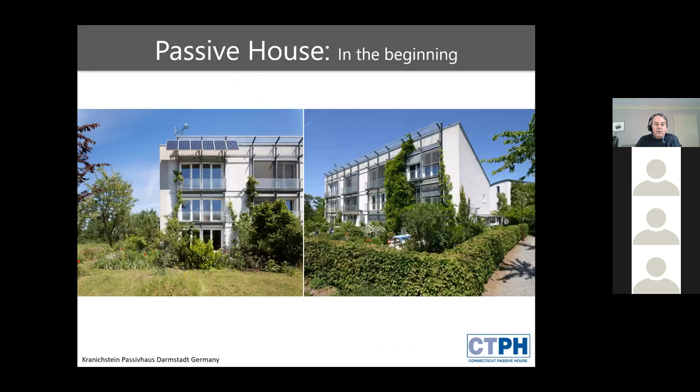In 1991, a physicist, Dr. Wolfgang Feist, expanding on work that had been going on in Canada in the 70s and 80s on super insulated houses, set out to design a house without heat, a pretty radical concept. The result was this 4-unit townhouse, of which he occupied the end unit, and he fitted it out with data acquisition systems to test his objectives and theories about how this could be accomplished. From this experience, he developed the Passive House methodology, a proven, measurable, science-based system to drastically cut energy consumption. In the 30 years since, thousands of passive house structures have been built all over the world.

Dr. Feist is a brilliant physicist, but not a great branding professional. The chosen name has caused some confusion and perhaps hindered its growth and adoption, and hopefully we can clarify any of those misconceptions in the next hour. As the following slides will show, Passive House principles can be incorporated in multiple building types and styles across the architectural spectrum. It obviously relates to single family houses and can be a very contemporary design, such as this one in Washington State, or more traditionally designed single family houses, such as one right here in Connecticut.

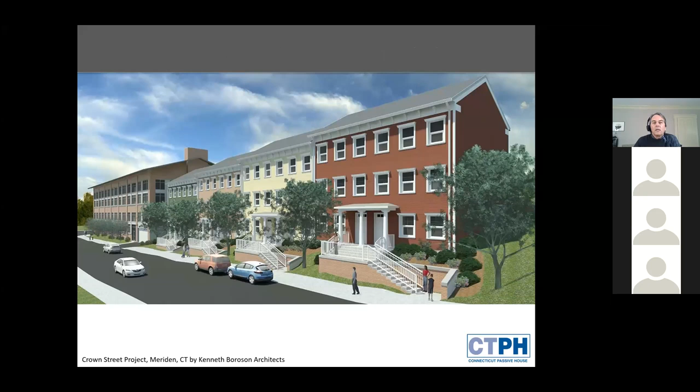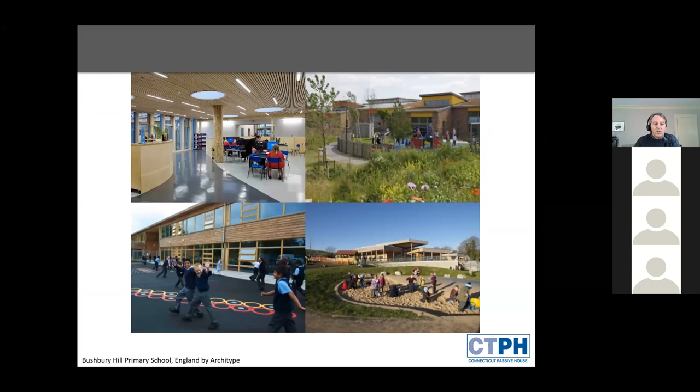Passive House is being used more and more for affordable housing, multifamily housing in Connecticut, like this project, and throughout New England and the country. Passive House works for office buildings. This is the headquarters of the Rocky Mountain Institute in Colorado. All over Europe and increasingly in the States and in New England and in Maine especially, Passive House buildings are being constructed as schools with obvious benefits for the inhabitants and for the long-term benefit of the communities in which they belong. And institutions of higher education, colleges and universities who build for the long term are increasingly building their new projects to the Passive House building standards. This is a dormitory at Williams College.

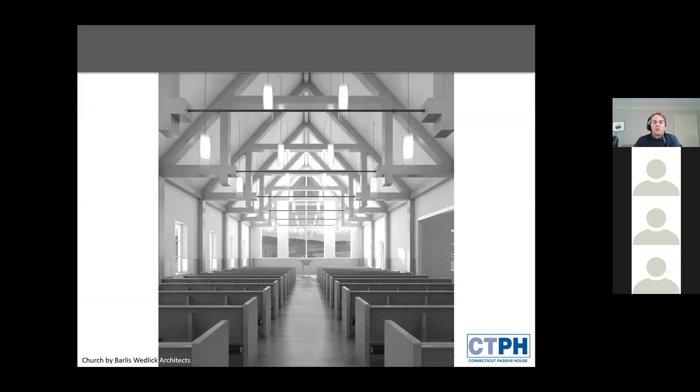But Passive House can also be used for churches. It can be used for infill urban housing, such as this project where an old brownstone was renovated in Brooklyn to Passive House standards. And it doesn't have to be low rise. More and more high rise office buildings and apartment buildings are being built to Passive House standards. This is the residential tower at the Cornell Tech campus on Roosevelt Island in Manhattan, 26 stories, 352 apartments, all built as a Passive House structure.

And finally, on the books now, and I think close to starting construction, if not started already, the Sendero Verde project in East Harlem, which is a mixed-use affordable housing complex, which could become the largest Passive House project in the world at 709 units, a school, a community service space, public gardens, and retail. So we come up against a lot of myths and misconceptions about Passive House out in the world and even among the profession, among architects and builders and engineers, such as that it's only houses, which the previous slides have dismissed. People assume that it's highly insulated and airtight, it must be stuffy and you can't open the windows. All of these things are untrue.

Expensive? No. Upfront expense, but quickly made up by reduced mechanical costs and savings over the life of the building and utility costs. People assume that a building that has reduced the energy consumption down to near nothing must be too complicated, and a very smart house full of sophisticated wiring and sensors and things. That's not true at all. A smart house type thermostat in a passive house will just die of boredom because all it does is monitor a stable temperature with very minimal variation. And finally, that it's only suitable for temperate climates. Passive houses are being built in the far reaches of Canada, in our country, Minnesota, Maine, cold climates, as well as in Australia and the southwest of the States.

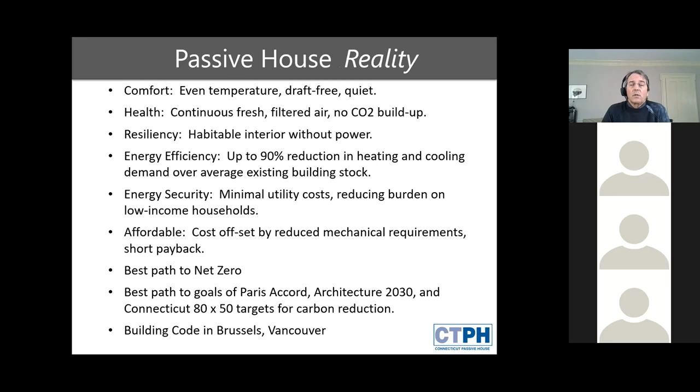As I mentioned, the cost upfront for a more robust building envelope is quickly offset by reduced mechanical requirements and a short payback. And it is the best path to get to the goals that we're trying to achieve in the next few years, the Paris Accord, Architecture 2030, and within our own state, the Connecticut 80 by 50 targets.

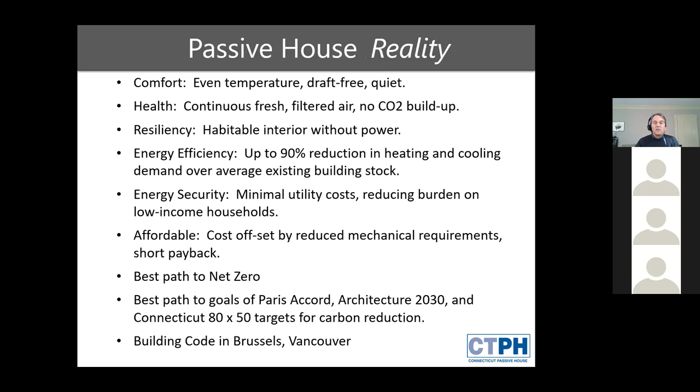In some cities, passive house is now the building code: in Brussels, Belgium, in Vancouver, in Canada. This is the way you have to build. They're taking the long view. So what does define a passive house? There's a short little video here that tries to answer that question in 90 seconds.

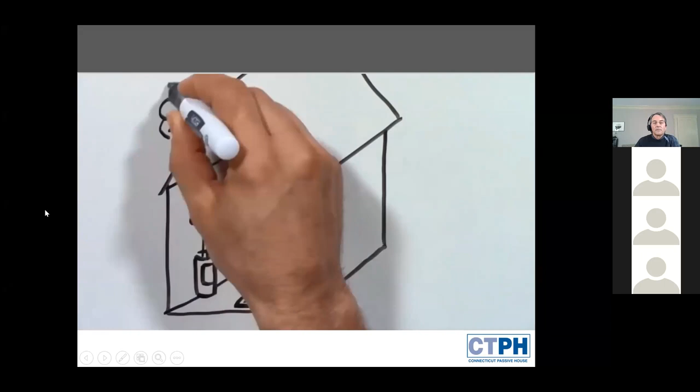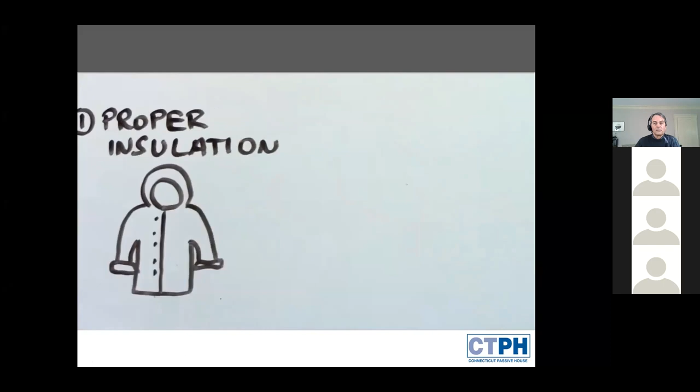Passive house explained in 90 seconds. Does your house have a heater in the basement or maybe a fireplace? Probably also a central air conditioner or maybe a window unit. Did you ever wonder if it was necessary? In 1991, a physicist in Germany, Dr. Feist, built the first passive house. Here's what he did. 1. Proper insulation. It's just like wearing the right winter jacket, it also doesn't need a heater. 2. No air leakages. There should be no holes, small or large, to let hot air out of the house.

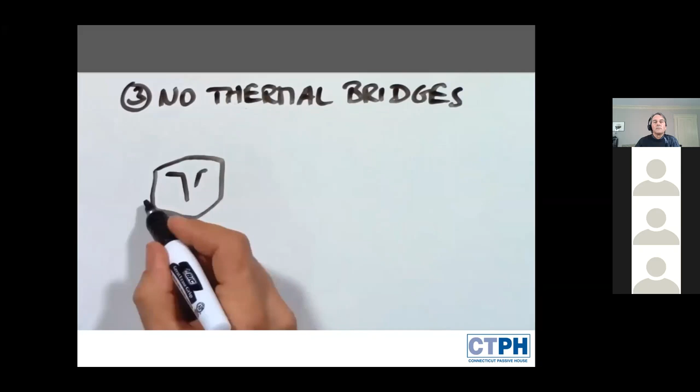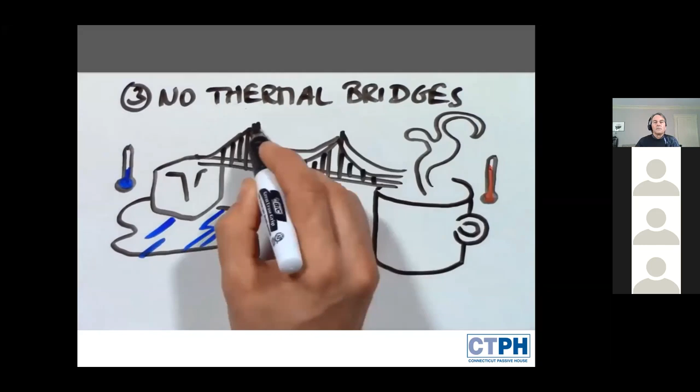3. No thermal bridges. A thermal bridge is like a road for heating energy in which warmth can travel right through your walls. As a matter of fact, most of our houses have thermal highways in our walls where heat can easily travel to the outside. Plus, the house needs proper windows, most of the time with triple pane glass. It needs to be oriented properly so the sun can heat it in the winter and shade is provided in the summer. And it uses an HRV, a device that provides the inside with fresh air without letting the heat out. Add all these things up, and it turns out your house doesn't need a heater or air conditioner.

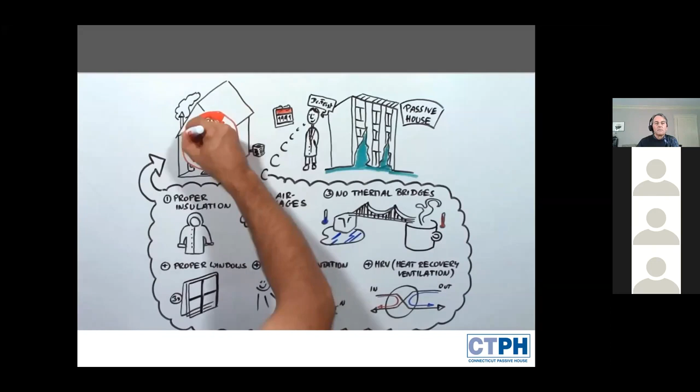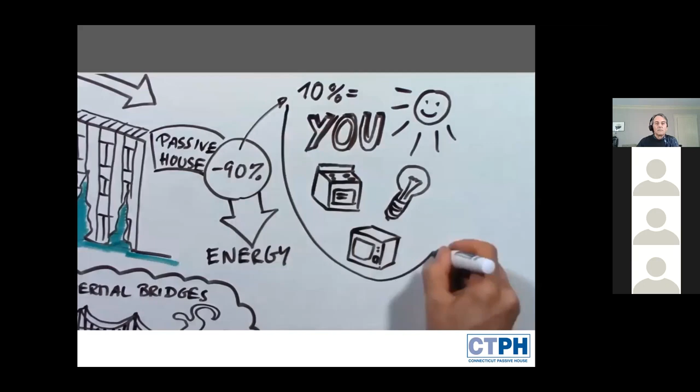So where does the heat come from? A passive house needs 90% less energy, and that can easily be supplied by your body heat, the sun, your appliances, light bulbs, and even your TV. This saves you a lot of money on your heating bill and helps preserve the environment. Did we make it in 90?

Well, you don't need to see that twice. Passive house.

It's important to understand that passive house is a performance-based standard. It's not prescriptive. It doesn't tell you exactly how to achieve these goals. It is performance-based, and it's validated through energy modeling, a few different software packages that can be used. It's validated through the strict standards and protocols that are applied to certain elements to get a passive house certification, such as windows and ventilation and mechanical equipment.

Construction details are verified, tested, time tested, and vetted by Passive House Institute. And finally, on site, you're validating your own performance through blower door testing and ventilation system commissioning and sign off.

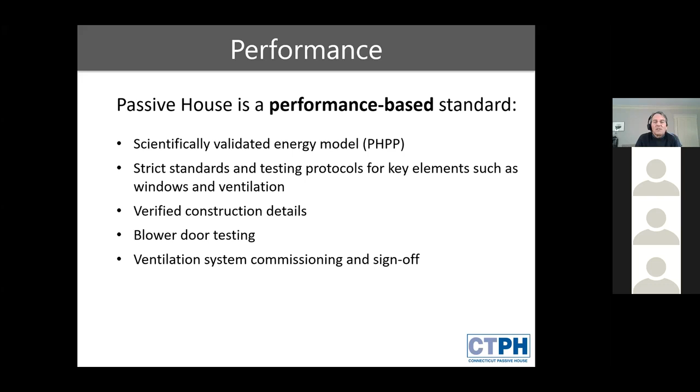So we get to the 5 principles which were alluded to in the little video. The 5 basic principles of passive house construction include thermal insulation around the whole building envelope, thermal bridge reduced design, passive house windows and doors, airtightness, and finally an adequate ventilation strategy. We're going to touch on each one of these 5 principles very superficially over the next few minutes. The first being insulation.

So why do we care about heating in buildings? That's kind of a silly question. Obviously, we want to stay warm when it's cold out, but we should understand that space heating accounts for a huge majority of the energy consumption. This is just an example of what it means in New York State, space heating as a percentage of total energy consumption.

In the US, across our whole country, buildings consume 48% of US energy and contribute 45% of US greenhouse gas emissions. According to the Sierra Club, in New York City, buildings are responsible for 67% of the emissions. And that makes real estate the city's most polluting industry, ironically.

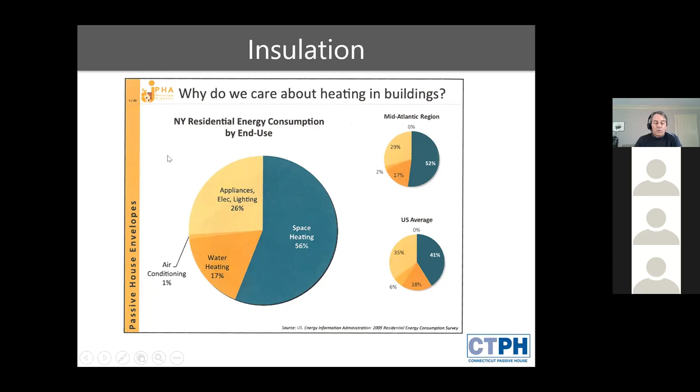So we need to try and reduce all of these things. And in a passive house building, we do it through obvious ways. We increase the R value and the robustness of the building insulation system. There are dozens of ways to do this, varying materials with different degrees of effectiveness and R value per inch, which comes along with different degrees of environmental consequences. Again, passive house doesn't tell you what you have to use or even how much. You just have to use enough to get to the standards to certify your building at the end of the process.

Typically, though, a single family home in our zone for passive house might have an R60 roof, R40 in the walls, and R30 in the floors or under slab, with the obvious benefits of reduced heat loss in winter, reduced heat gain in summer, and often overlooked but very important for humans' comfort are the interior surface temperatures. If we provide a thick enough envelope, these interior surface temperatures are not much different from the temperature inside the center of the building. So you're not aware of changes in temperature and drafts and increased discomfort.

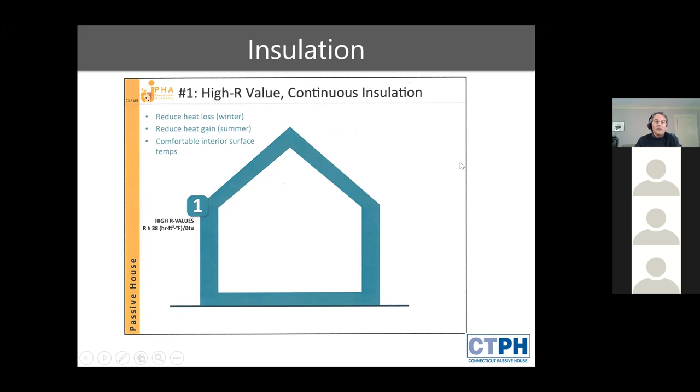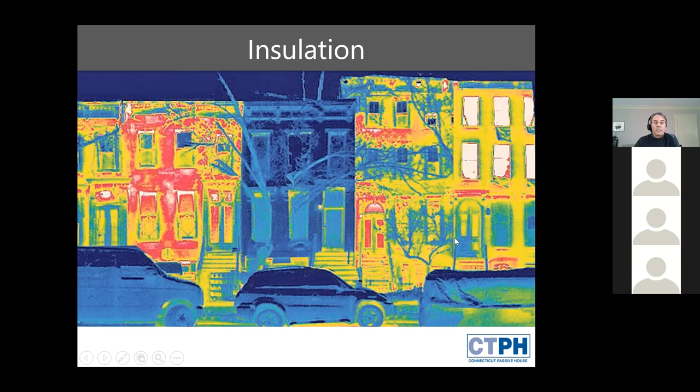When we think about how we're insulating these buildings, we need to think about the wall cavity, and the key word there is cavity. A lot of contemporary framing and engineering for buildings requires more and more wood studs, and this is an example of a kind of a wall that makes a passive house adherent start to break out in a sweat. It's just a highway for thermal bridging and all heat to be drained out to the exterior. Plus, it doesn't allow any space for insulation within that wall cavity.

So there's a few different options that we could pursue. Just one of many strategies is a double stud wall, a simple framed wall with conventional framing on the outside for added insulation, or a structural framed wall on the inside with a truss joist set up to have the added depth that allows for the continuous insulation blanket. All of these methods are standard framing, just not something that a framer does every day, but certainly not that much to ask to get the benefits.

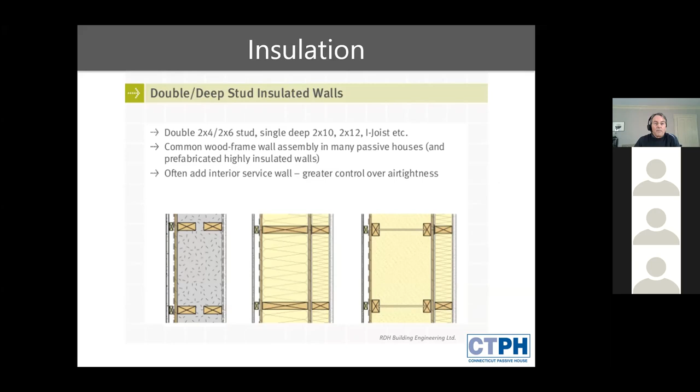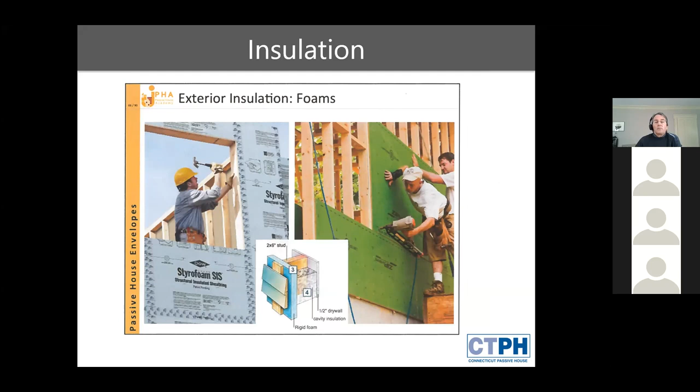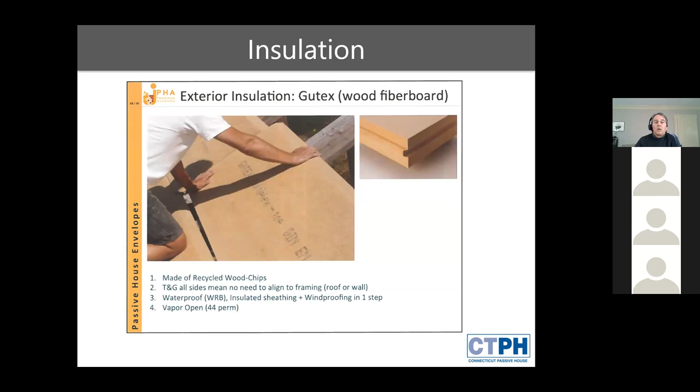We have to be considering the exterior insulation so that we get that continuous wrap of insulation around the perimeter of a building and minimize any opportunities for thermal bridging. That can be accomplished with exterior foams or some more environmentally benign materials such as a wood fiberboard product. This one is imported from Germany, but there's now an old paper mill in Maine being converted to produce this in the States. So hopefully we'll be seeing a lot more of that readily available on the market.

And in masonry construction, obviously masonry is a terribly conductive material, poor insulator. So we have to keep that exterior wrapped with a continuous insulation of an exterior insulated finish system or some kind of insulating blocks, which then can be stuccoed or cladded over in some form.

You have to think about the roof and how you're going to get added insulation in your roof. And one strategy in wood frame construction is with a raised heel truss, where your truss is designed so that you get that continuous 16, 18, 24, however many inches of insulation your project requires, that can run continuously over the top plate of the wall, guaranteeing that there's insulation blanket wrapping your building.

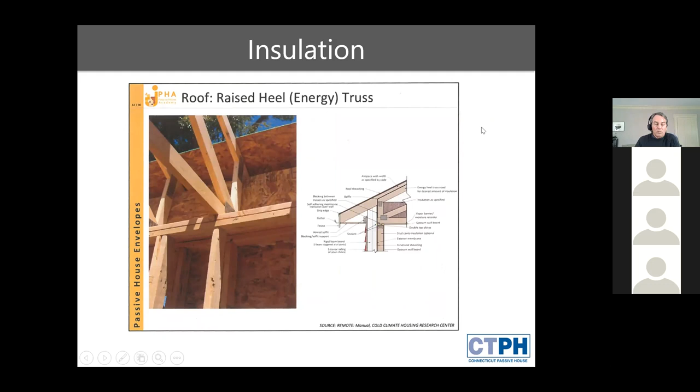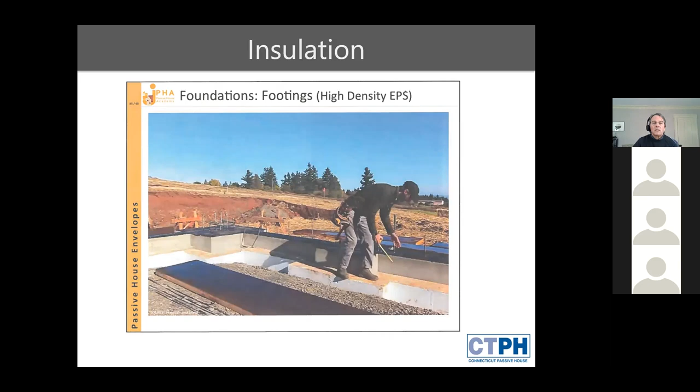And we have to think about foundations and footings. Obviously below grade, we're using a lot of foam to do that. There are other products coming online that are available, such as a Roxul product that can work under a slab, a product made of spun recycled glass material, which works as an insulator as well as a sub-base for your concrete slab. So there are many materials and strategies. Again, it's not prescriptive, it's all performance-based. And that segues us into the second principle, which Trip will describe for us, thermal bridge-free construction.

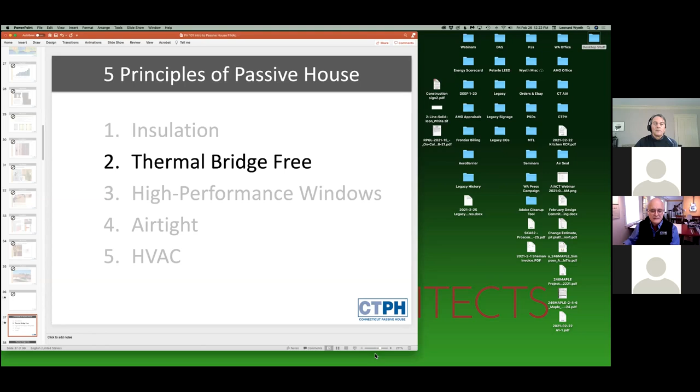I assume that's out there. Does that appear right on the screen? Yep, looks great.

Thermal bridge free. Let's face it, some materials conduct heat a lot better than others. Obviously, steel is a lot better conductor than fiberglass insulation. However, wood, for example, is also a pretty substantial thermal bridge. The notion is very simple. The more thermal bridging there is, the more heat loss there is in the envelope.

So you can imagine that all thermal bridges, by whatever material, affect the amount of energy required for heating and cooling. It's a condensation and moisture related issue, and there's thermal discomfort. Basically, thermal bridges are bad.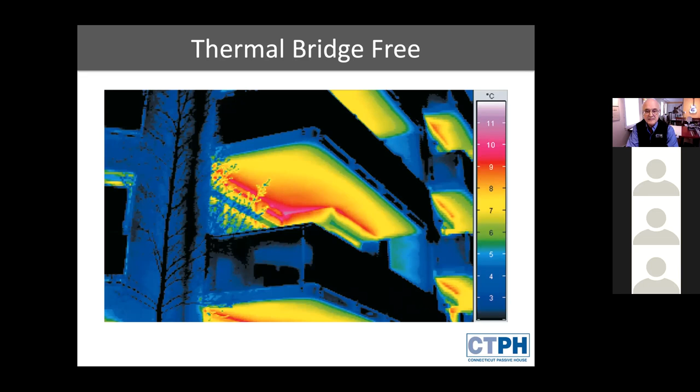I'll take an extreme example. I really, really like this building, the Aqua Tower in Chicago. But notice the architectural expression of these balcony-like structures that extend out past the thermal envelope; notice that they get denser towards the top. Chicago is known as the Windy City, and there's more wind up there than there is at the street level. So what does this look like from a thermal camera's viewpoint? Looks like a really effective heat radiator.

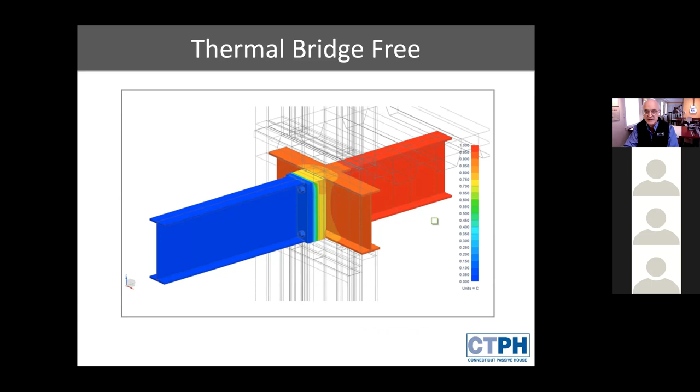It's also not necessary. Available now are structural foam blocks of such high compressive strength that they're very good insulators, not just thermal breaks, but very good insulators between exterior steel and interior steel. And this is equally true for columns. Their compressive strength is more than adequate to handle that.

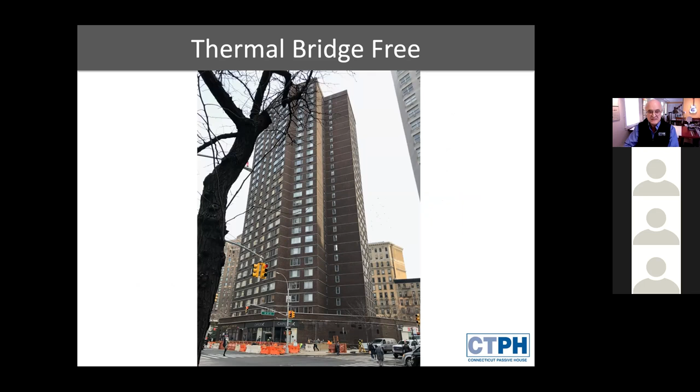I just wanted to throw this example out because we've all seen buildings like this. It's a developer housing project of structural slab, where the slab is extended out to the face of the building and expressed. And it's done that way for purely economic reasons. It gives a platform on each floor to build up the CMU, some XPS foam insulation, and then some brick, with metal studs and sheetrock on the inside.

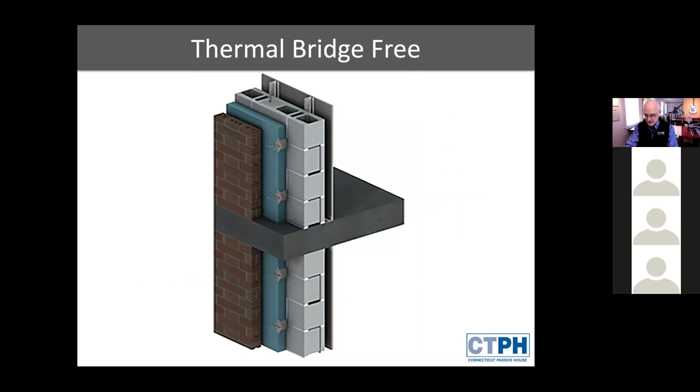But look at the thermal bridge of that slab extending out there. No matter how you cut this, that slab is going to be cold on the interior, cold enough, in fact, for condensation, even frost and ice to build up on really cold winter days inside the building. Another example of the floors really being effective radiators out to the outdoors.

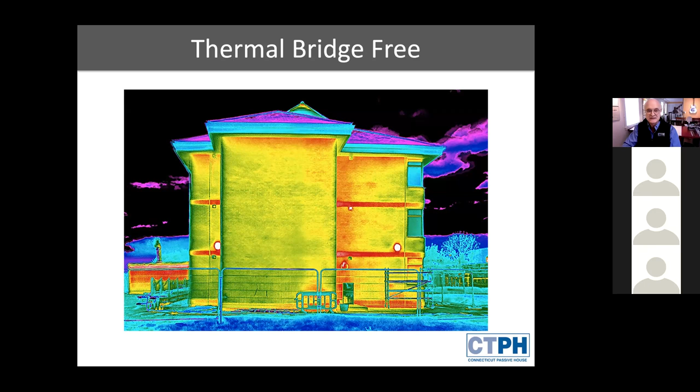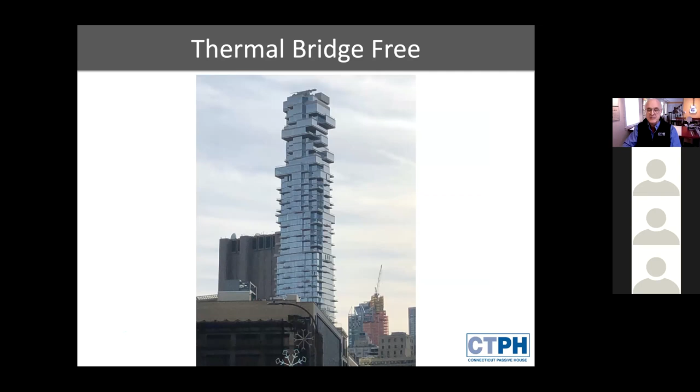And you can probably imagine, when I snapped this photo driving out of New York, I'm not sure who did the building, but the amount of energy that's escaping through a structure like that.

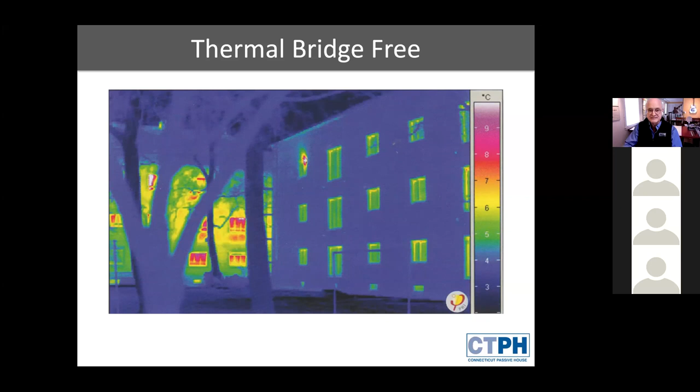So what about the windows? We've been taught from the start that windows are compromised. I mean, think of it as an ideal. If you had an enclosure that had no windows or doors, it was just a beautifully insulated box, you'd have a heat loss ideal. 68 degrees inside, 0 outside, no leaks, no drafts, no problem.

Well, almost no problem. If you're claustrophobic, there might be a big problem, but you might find it dark and depressing. You might have a perception of no fresh air at all. But by golly, it's a good thermal envelope, and it'd be easy and cheap to heat and cool.

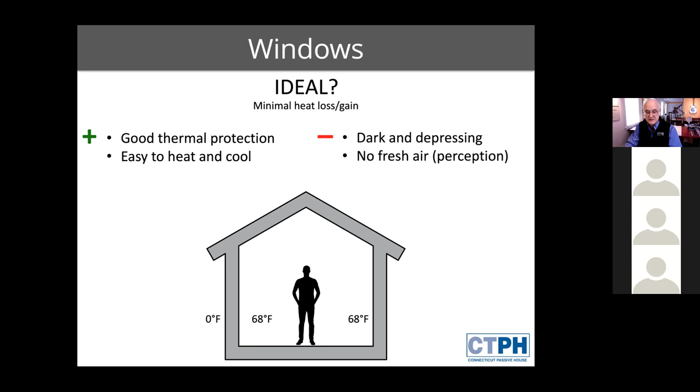But if we have to have windows, okay, let's just throw in a single glazed window to make a point. 0 degrees outside, single glazing, even if it's fixed, you're probably going to have surface temperatures below 40 degrees, so the air temperature on just the inside layer of the glass is going to be barely above the 30s.

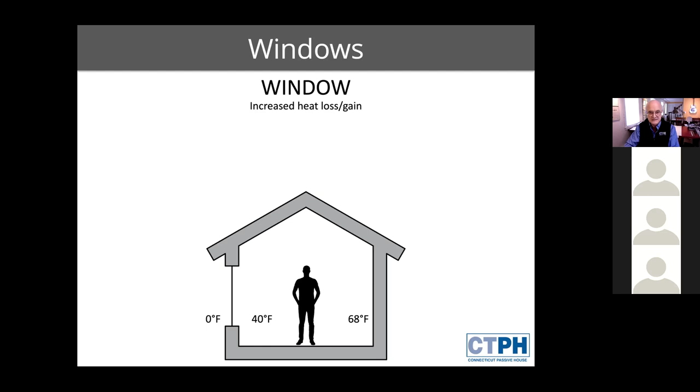So the consequence, of course, is you've gained natural light and views. You've got fresh air now, assuming that it operates. You can use it as an extra escape, that's good, or throw a chair through it if you have to. But you're going to pay more for heating and cooling, and you're going to have condensation and frost on a window like that.

The additional problems include convection, a cycle where the 68-degree air gets close to that cool surface of the glass, it cools rapidly, falls, and creates a good sized draft on the bottom, displaces the lighter, warmer air and creates a cycle. In other words, a constant draft along the lower level. Not only that, of course,

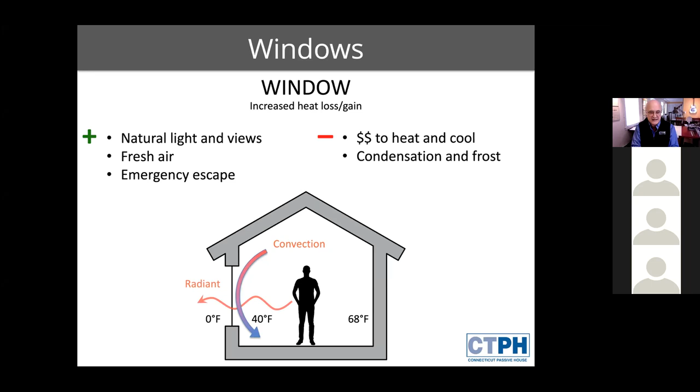but as we all know, there are two types of heat. There's convective and radiant. Radiant is only line of sight, and it's directly from a warmer surface to a cooler surface. So if you have a bare arm, for example, in a situation like this, even in the center of the room, you feel goosebumps on the exposed arm because the heat is leaving the body so quickly.

So in this situation, you have limited choices. You can kind of put a scarf on the guy, better boots, and suck it up, or deal with some mechanical solutions. But let me address the condensation for a second. Here's a double glazed insulated window in a northern climate.

It's clearly cold outside. It's had multiple hits of cold, if you will. The outside is a sheet of ice along the lower portion, and the inside is a sheet of ice along the lower portion. A couple of things to note. Note that in the middle of the glass, there is not a condensation problem. And remember that all of the American manufacturers will give you an R value of their windows in the center of the glass. This is a great example of the center of the glass is usually not the problem.

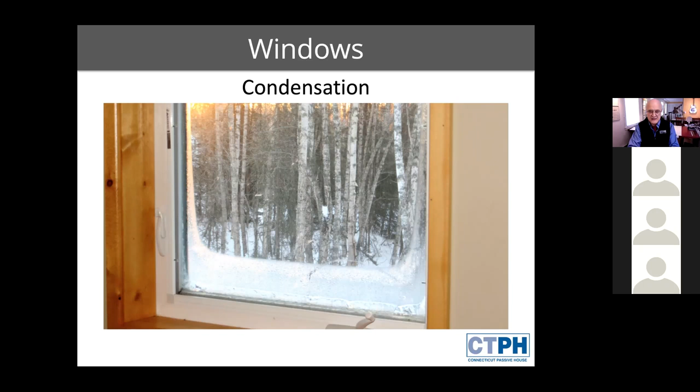The problem has to do with the thermal bridge around that perimeter. That's an aluminum spacer and in this case, a PVC frame. It conducts heat so effectively that you end up with situations like this. Now, don't get upset. I know you haven't looked at a psychrometric chart since high school or college, but this is just to make a point.

It's looking at 68 degrees inside and 20 degrees outside at 30% relative humidity. The dew point's at 35 degrees Fahrenheit. At 50% relative humidity, it's at 49 degrees Fahrenheit, and at 60% relative humidity, it's 54 degrees Fahrenheit. So rule of thumb, if you want a window that will, in our heating zone, not suffer any condensation, it has to perform effectively enough so none of the interior surfaces, either on the glass or the frame, fall below approximately 60 degrees. Obviously, higher is better.

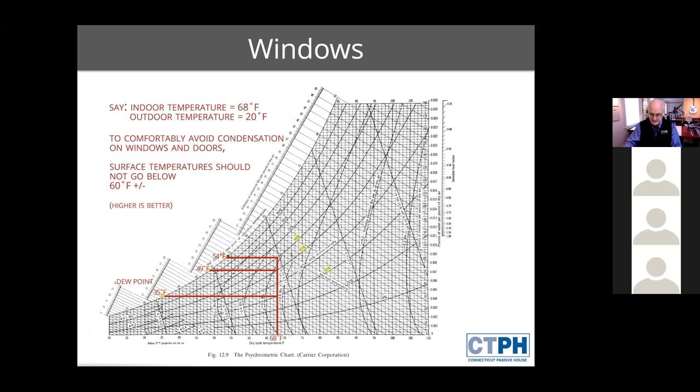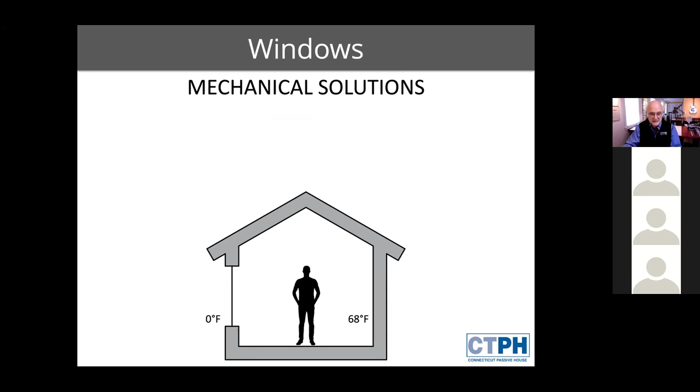So we'll circle back to that. Let's go look at the mechanical solutions to historically the problems that we've seen in the past. Put a radiator under the window to counteract the falling cooler air so that that convective fall is counteracted by a heat source. And what you're doing is mixing the air at that point. You're not actually getting rid of the drafts. You're taking the edge off them, if you will.

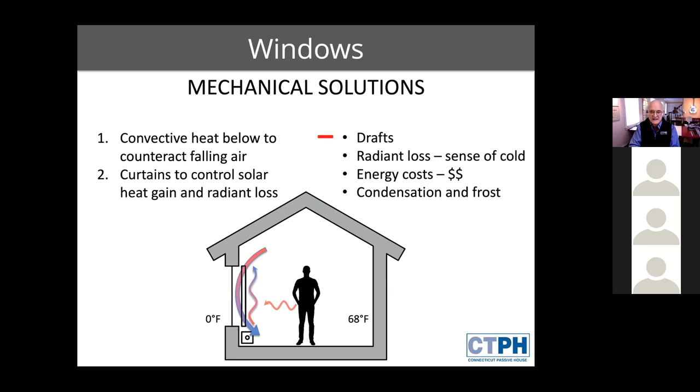You're also creating a kind of radiant heat source that counteracts some of the radiant loss from the skin directly to the cool surface. But you can also put up a curtain or any object in between you and the window, but now you've given up the view just to stop radiant heat loss. And you've still got the drafts, you've still got the radiant loss, you've got a sense of cold, it's still costing money to heat, and you still have the problems of condensation and frost.

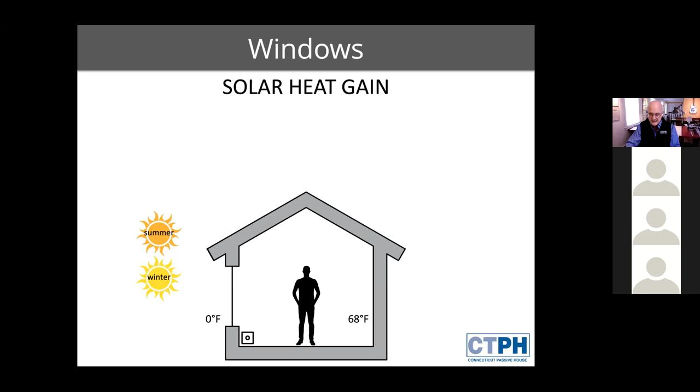Obviously, if you don't control the summer or winter heat gain, especially the summer, you can get into a cooling problem, which is easily solved by a bigger overhang. So that's easy to control. And you try to maximize, obviously, the winter sun because the heat helps you in that circumstance. But you still have the need for the radiator for nighttime and cloudy days. You still have the infiltration, radiant, convective losses. You still have the condensation and frost.

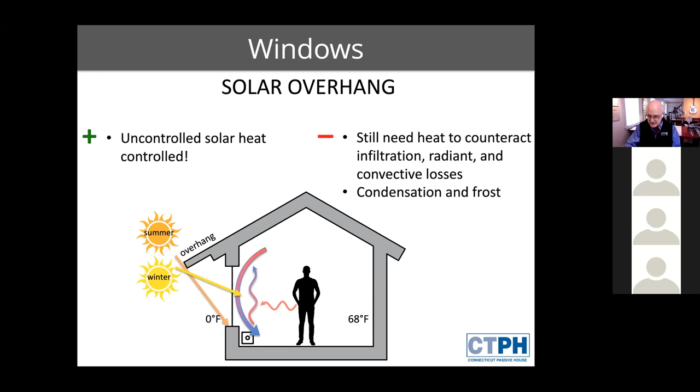High performance windows: if you can put a window in that actually does perform where all parts of the interior, meaning the glass, the frame, and the installation, are at 60 or 62 degrees Fahrenheit, a couple of things happen. Obviously, you've solved the condensation problem, but you've also eliminated the need for the heat source under the window, because at 62 degrees, you don't have a draft inducing energy fall to the floor there, and you're not cycling the air in the room in any kind of significant way.

So by increasing the performance of the window frame and installation to that level, you start having a ripple effect. Notice that the interior temperatures are now at worst 62 to 68, and it stays more in the comfort zone. At some point, the windows can actually be a net gain, and this can make the client particularly happy.

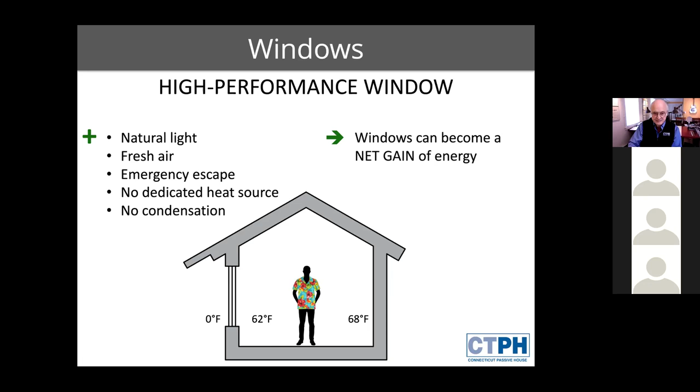I'm going to change metrics here. The numbers you see are in kilowatt hours per square foot per year, but the metric is simple at face value. A loss is a negative, and a gain is a positive. Let's take the example of an R30 wall on the left. A wall, no window, no door, just the wall. Even just a wall, you see a 2 kilowatt hour per square foot per year loss. And remember, this is measuring over a year's time.

And into that wall, we stick an Energy Star casement window. In other words, R3.3 overall. Now we've gained the view, the light, and on the sunny days we gain a plus 11. But we're still losing minus 18. In other words, we're losing more than we're gaining. So we've gone from a net loss of 2 to a net loss of 7 by that window.

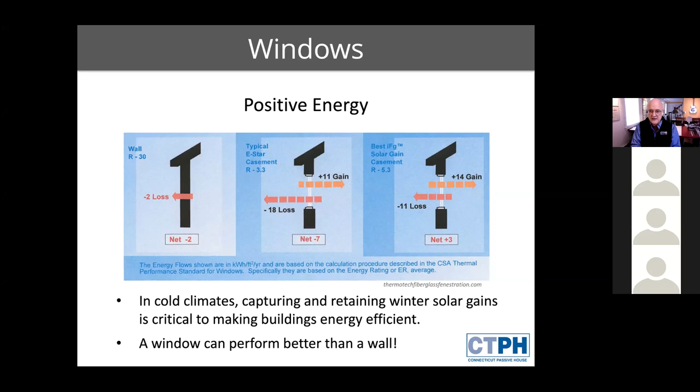But let's flip the formula here. Let's put a window in that's, say, R5.3 overall. Now, everything upends. It's almost counterintuitive. By the improvement in the window, including the films and the orientation, we've boosted the gain from plus 11 to plus 14 and dropped the loss from minus 18 to 11. And we end up actually gaining energy in the building. In fact, it means the window is better than a wall without a window in the big picture. The window can perform better than the wall.

So what makes a high performance window? Triple glazing, the right coatings. In other words, coatings selected for orientation. Certain coatings help reflect heat. Certain coatings help retain heat, and their careful selection is critical. Gas-filled insulating units. The frame needs to be highly insulated, and we'll have a slide for that. And the overall unit, the R value has to be as high as possible. The inverse is, of course, saying it's a low U value.

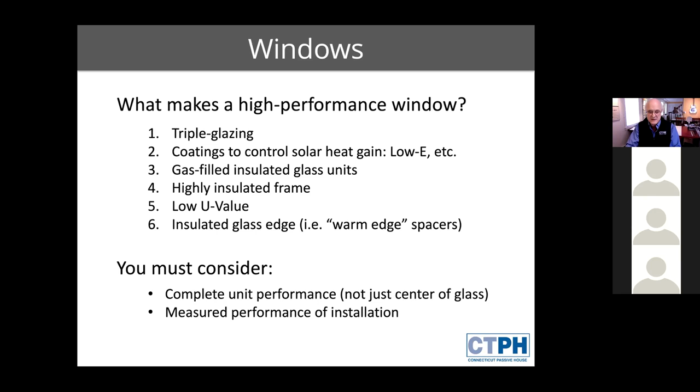The insulated glass edge can't be aluminum spacers. It can't be a good thermal bridge. It needs to be something that actually insulates. So rather than aluminum, having a warm edge spacer, a material that will actually serve the airtight needs and not transmit thermal energy. In other words, you need to think of the whole picture, not just the center of the glass. It's got to be the glass, the frame, and the installation. And the installation has to be good enough that you can actually measure the performance after the fact.

Item number 4, airtight. This requires an example. So let's think of this as a generic building. And to make all the calculations really easy, we'll have a 2-story building that's 32 feet square, 18 feet tall, and a 45-degree angle on the roof. No windows, no doors.

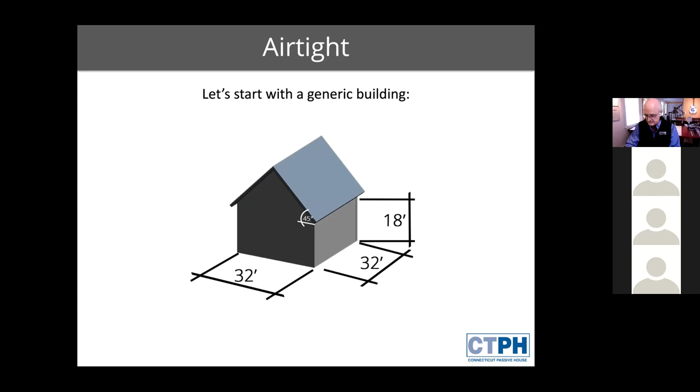And to make the calculations even easier, we're going to say that the walls, the floors, and the roof are all R50. This is not a high value. By the way, I'm led to believe that the 2021 Energy Code, on its prescriptive path, is going to require roofs be R60 minimum.

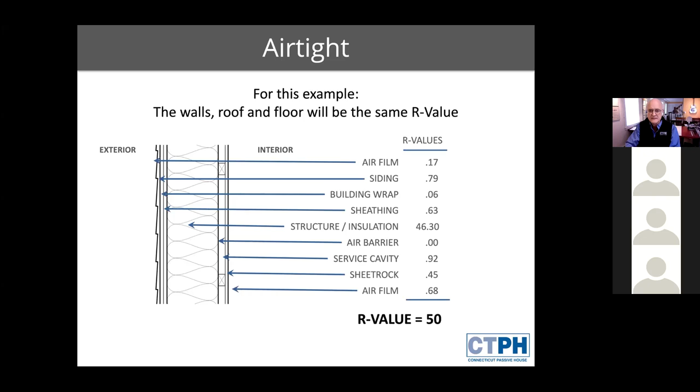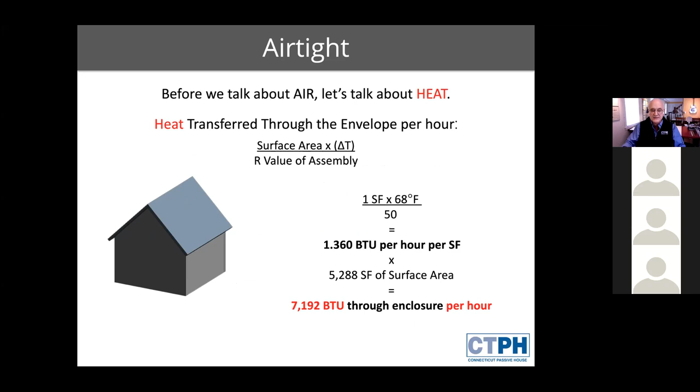So before we talk about air, we need to talk about heat. The heat transferred through the envelope, just the envelope. So make the calculation and you come up with 7,192 BTUs per hour. I want you, please, to remember that number, or if you can't remember the whole number, just remember 7,000. 7,192 heat loss just through the structure.

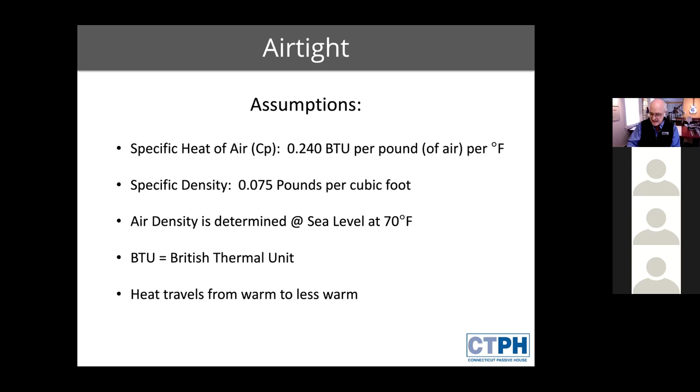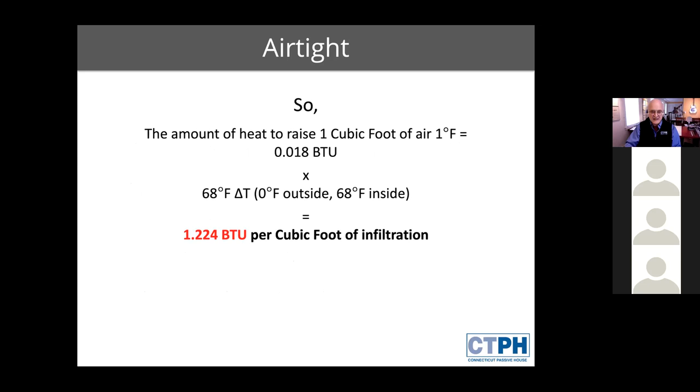We're doing this in British thermal units, BTUs, which I'm sure you remember 1 BTU is about the same as the heat given off of 1 burning match. And of course, heat travels from warm to less warm. There's no such thing as hot and cold. There's only heat and lack of heat where calculations are concerned. So the amount of heat, 1 cubic foot, gives us the per cubic foot infiltration rate. And so 1 air change per hour on our little example would be 28,091 BTUs per hour as compared to 7,000 and change for heat loss through the structure.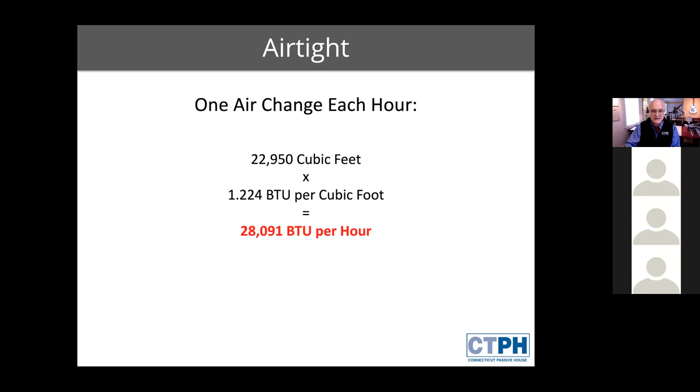It's considerably larger. But consider an old New England house. It is not at all unusual in a New England house to see 12 air changes per hour. In fact, seeing much more is very usual. A 5-bay colonial with a center chimney, you can't even, by blower door, get a reading on the air changes per hour because so much air comes and goes from the chimneys, as well as all the older methods of construction.

But 12 air changes per hour, which is not unusual, would be 337,092 BTUs per hour. So imagine if you want to heat this building, this 2-story building, you would have to assume that your heating equipment would have to have the capacity to do at least this much plus the heat loss through the outside. So 337,000 plus another 7,000.

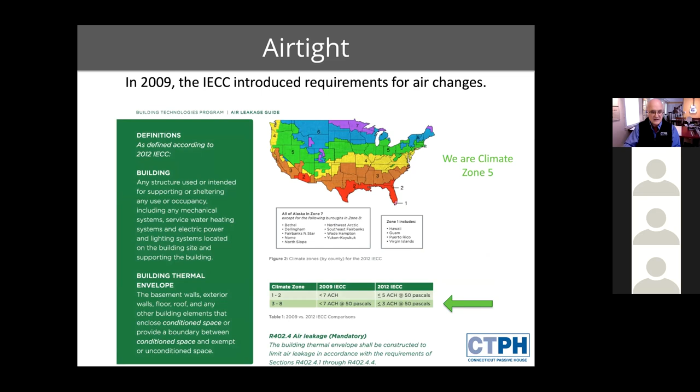Okay, I'm going to cover a bunch of things quickly. We're in climate zone 5. So that's our reality here. Now, it was in 2009 that the International Energy Conservation Code introduced for the first time any reference to air changes. And the magic number they used was it needs to be less than or equal to 7 air changes per hour. 2009, first reference. So 7 air changes per hour in our example would be 196,637 BTUs per hour. That's better than 337.

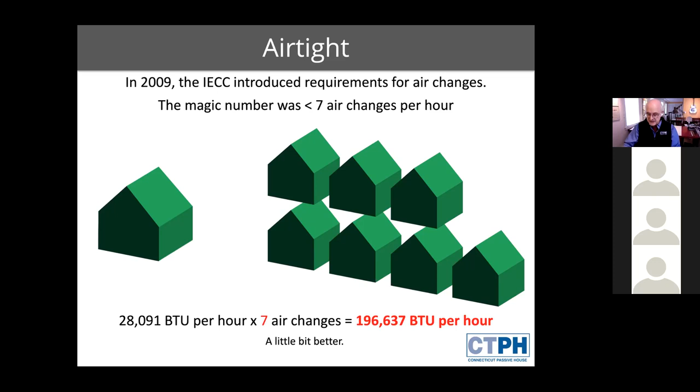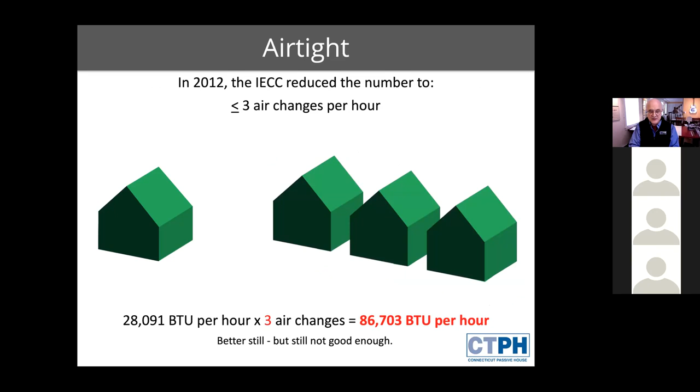Then in 2012, the International Energy Conservation Code reduced the number to less than or equal to 3 air changes an hour, which would bring it down to 86,703 BTUs per hour. It's better, but it's not great. 86,703 BTUs per hour is a big number, especially when you compare it to the very small number that's escaping through the structure. So any discussion about energy conservation, any discussion about sizing equipment really is centered around how many air changes per hour does your building actually have in real life. The fewer the air changes, the better.

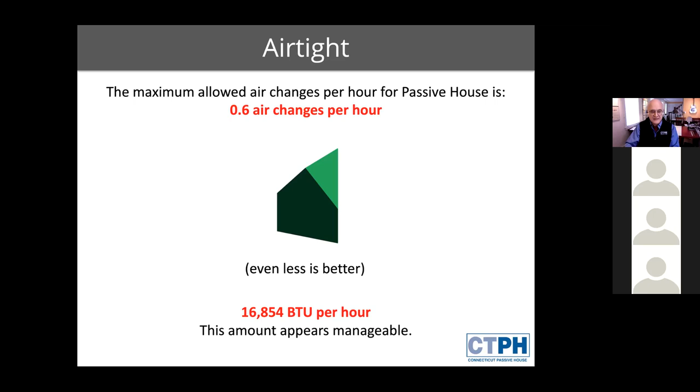The maximum allowed air change for a passive house is 0.6 air changes per hour. Now, less is even better than that, and anybody working on a passive house is going for a considerably smaller number, but 0.6 is the maximum allowed. And that brings the heat loss down to 16,854 BTUs per hour. Notice, still more than twice the loss through the envelope.

So consider, if you invest in the high R value for walls, roof, and floor, and you invest in the air sealing, you move the load down considerably, massively, 90% or more. And all of a sudden you're able to have much smaller heating and cooling equipment, much smaller, 90% smaller, which can be a significant cost, certainly significant space, and certainly a massive energy savings.

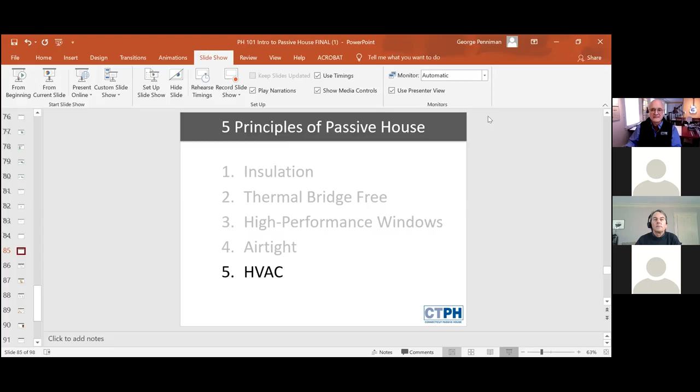So we've now, through Trip's good work, created a highly insulated building envelope. It's airtight with reduced thermal bridges. It's got high performance windows oriented for maximum solar gain in the winter and shaded in the summer. We now need to address the fifth principle of passive house building design, which is the HVAC systems.

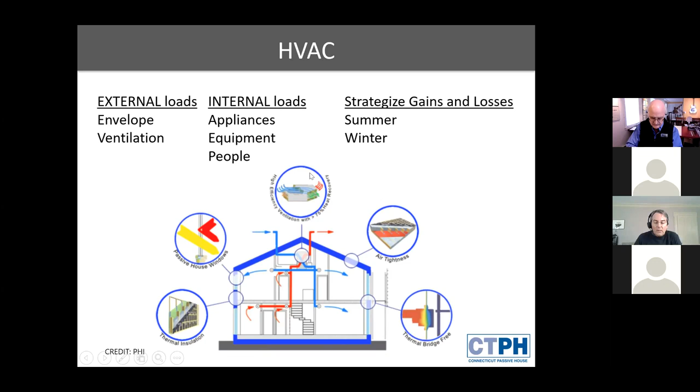With passive house, it's more about ventilation than heating and cooling. It's about balancing loads, offsetting the heat loss through windows, building envelope, and ventilation with the gains generated by solar gain, appliances, equipment, and people. And it's important to remember that in New England, as much as we would love to, we still have to provide some supplemental heat. What the fifth principle specifies is that you have to do this with high efficiency ventilation with a greater than 75% heat recovery. I'll explain what that means shortly.

But basically, in designing the house and doing all the calculations, you line up the losses on one side through ventilation, windows, cellar floor, wall, and roof, offset by the gains on the other side, solar gains and the internal gains that we talked about from people and dogs and cooking and anything that could generate heat within the building. And if we've done it right, we've reduced the need for additional heat to 4.75 kBTU per square foot per year as the heating demand.

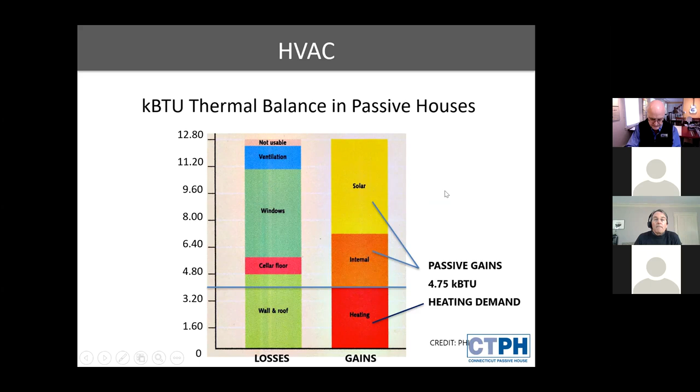If we've designed our building correctly, we maintain year-round comfort because we no longer have, as Trip was discussing, the heat supply below a window, which is radiating cool air into the space and creating convective currents and draft pockets and different temperatures from one side of a room to another.

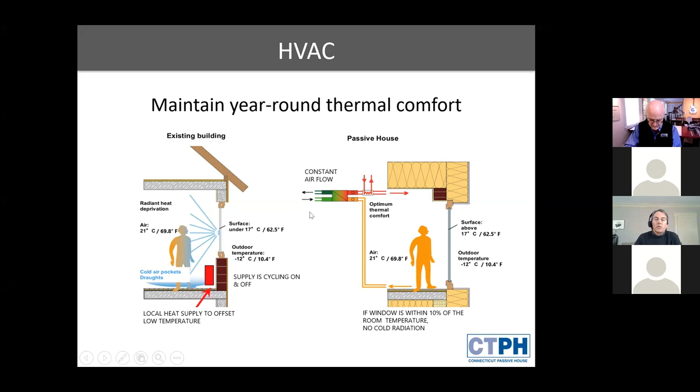Because we've done all that, we now free up the perimeter wall. We've got our thick insulation. We've got our windows, which keep the interior surface temperature above 62 degrees, so that we can move all the heating and ventilation to the inside of the building and leave the perimeter free for bigger windows, for furnishing, and just for greater comfort.

How we do this is with a heat exchanger, an HRV, heat recovery ventilator, or an ERV, an enthalpy recovery ventilator. And these will provide balanced ventilation year round. In the old days, we would turn on an exhaust fan in the kitchen or bathroom, which would depressurize the whole house, or you supply intake air only and you're pressurizing the whole house. What we need to do is provide this exhaust and supply in a balanced form.

And the way it works with the HRV is that continuously fresh air is drawn into the building, it's filtered, comes into the heat exchanger, where it passes by but does not contact directly the exhaust air being expelled from the building. That exhaust air transfers its heat to the incoming fresh air, and it has to do it at 75% efficiency at a minimum, meaning that 75% of that exhaust air's heat is transferred to the incoming air. And currently you can get on the market HRVs with much higher, in the high 80s, low 90s percentage of heat recovery.

So now that fresh incoming air has been tempered and warmed up as much as possible, it can pass through another supply of heater coils to bring it up to temperature if desired, or we can provide that additional heat necessary through mini splits, ducted or not ducted, or other heat pump, or some kind of heating strategy. It's up to you. But the main point is that this air is now circulated throughout the house constantly, 24/7.

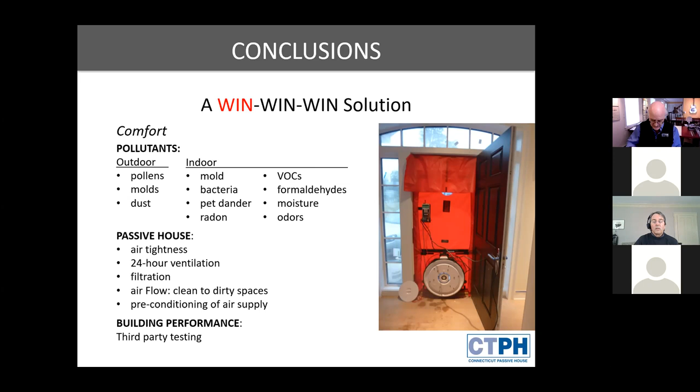And it's also guaranteed through third-party testing, so that you know that you're occupying a space that's been through this rigorous protocol. It's a win from an investment point of view. You're adding value to your asset, and you're also getting a guaranteed return on your investment.

As utility costs increase over time, you're getting that savings over time, and that just compounds. On the other hand, if you try to reduce your first costs and build a less robust building, you may save some money up front, but you're going to have ever increasing operating costs. So it's basically a deferred expense. And finally, it's a win as a step towards greenhouse gas reduction.

An Energy Star home, which is a pretty good way to build a house, is still burning 1.3 gallons per square foot per year. But finally, passive house is down to 0.4 gallons of oil per square foot per year.

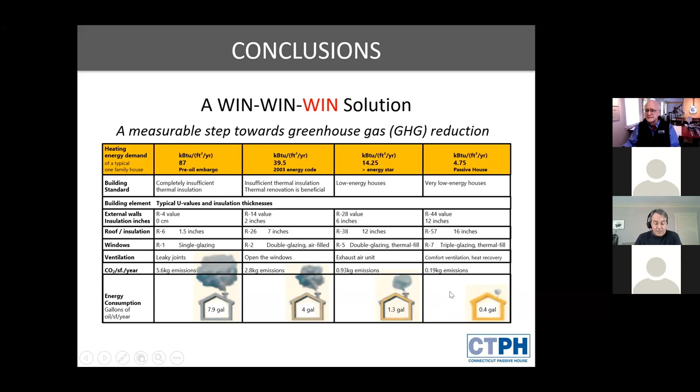So passive house is about comfort, it's about health, it's about resiliency, and it's about energy conservation. It can be accomplished with materials and methods that we're already using in construction. We know how to do this. It's nothing outrageous. We just need to work to make assemblies more robust and pay extra attention to how we detail and construct them.